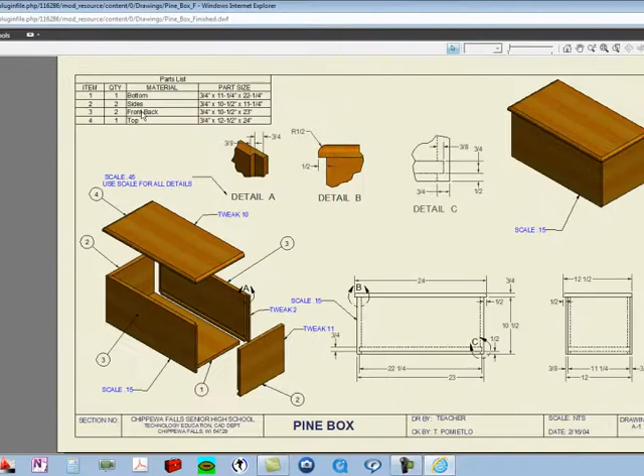The next part we're going to start is called the side. Looking at the side, the measurements for it are 10.5 inches tall by 11.25 inches wide.

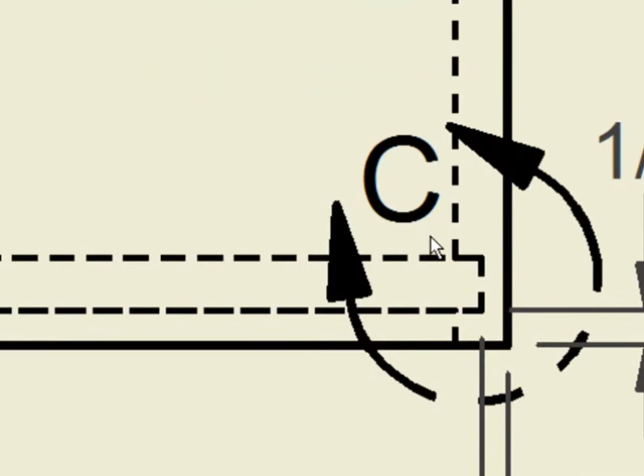If we take a look at the front view of the side, it's going to be a long, skinny rectangle with a little piece cut out at the bottom. This little piece cut out is called a dado joint. If you look over here in this close-up, you can see that little piece.

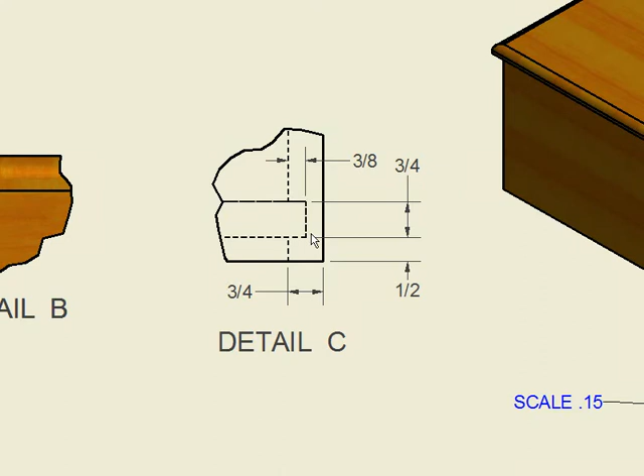Let's go up to the detail here. In the detail, you can see that this side piece comes up 1/2 inch, goes in 3/8 of an inch, comes back out, and then goes back up. That extends all the way through this side piece, this whole side.

So we're going to get started by drawing this first sketch on the side. I'm going to go to my Inventor program and start a new part again. My sketch window will come up, and this is my front view. I'm going to start by drawing that skinny rectangle.

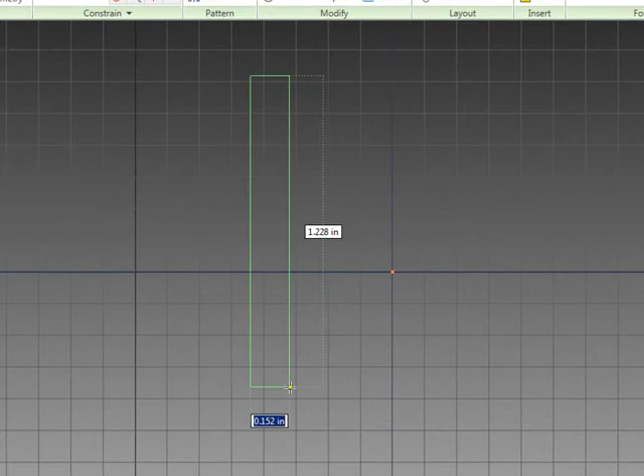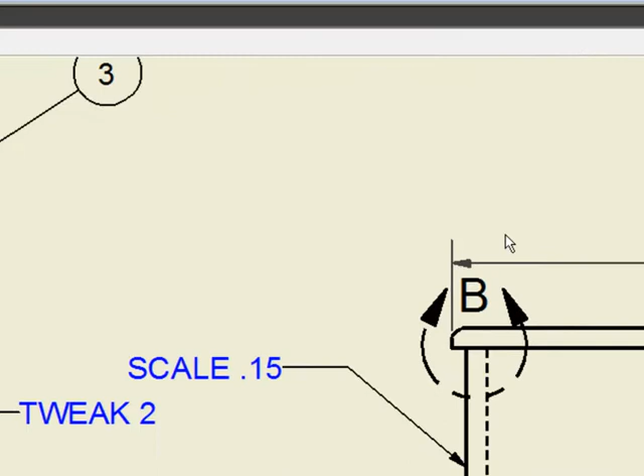Now this time I know the measurements, so I'm going to start off with my width. It's going to be 3/4 of an inch, or 0.75. Then the height of it's going to be 10.5. Now I got those measurements from right here: the distance up and down is 10.5, and the width across this way is 3/4. To verify that as well, I look up here in the chart: sides, 10.5 by 3/4.

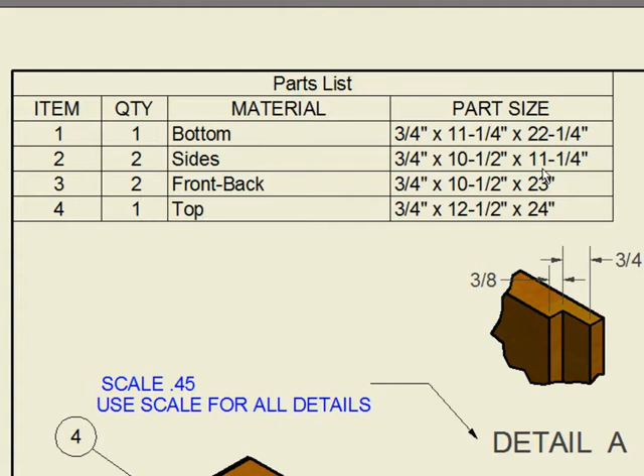Now we have to extrude it. When I extrude it, I'm going to extrude it to the distance of 11.25. Once I put 11.25 in there and hit enter, I go back to my home view and click on it, and there's the part.

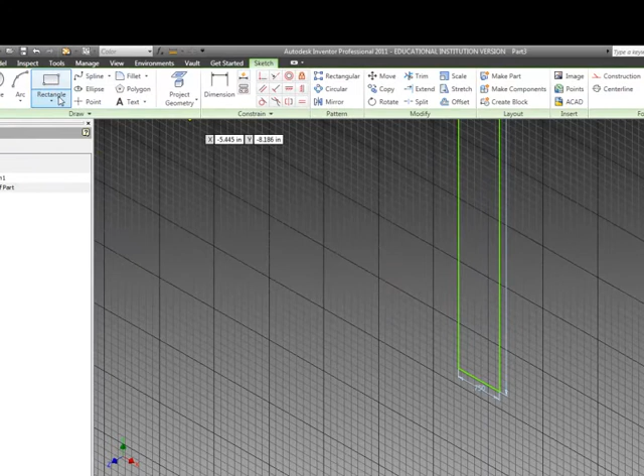Now before I extrude it, I'm going to go ahead and cut that other little piece in there, that little square at the bottom called the dado joint. I'm going to use my rectangle tool, but it's easiest to draw on this other part by looking straight at it.

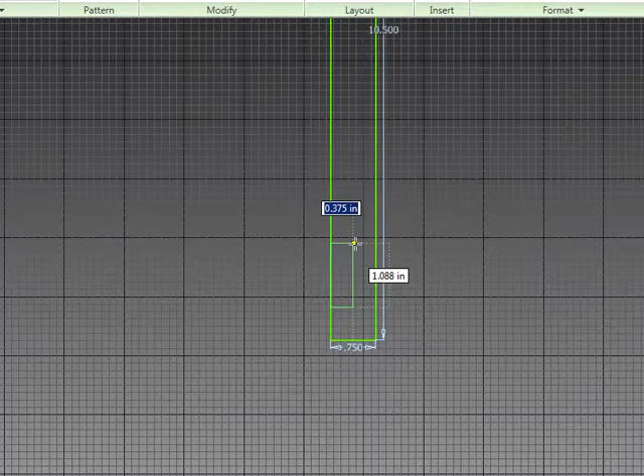So I click on my front button here, zoom in on it, and I'm going to draw with my rectangle tool. Along this edge, I click till I see the yellow dot, and I'm going to drag up. You can aim at the midpoint here, which is 3/8 of an inch, and I'm going to come up. As you can see on the screen, 0.375 is 3/8 of an inch.

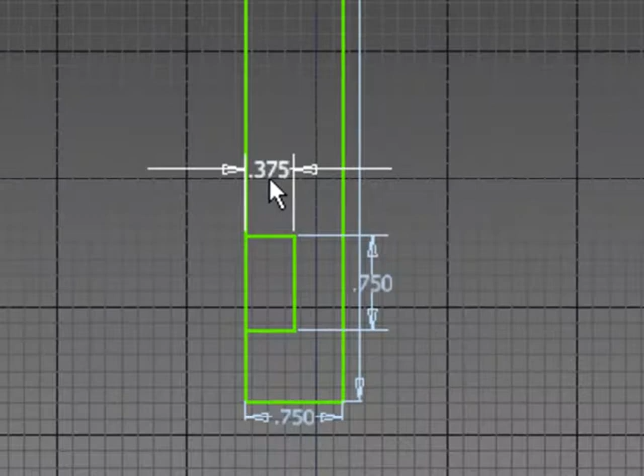So I'm going to hit tab, go to the height, and the height's going to be 3/4 of an inch because that's how thick the wood is, and hit enter. So what we have here is a little square cut out 3/8 of an inch this way, and to verify that I can dimension it like I did earlier. Click on that, drag up, and there's my 0.375, which is 3/8, and also 3/4 of an inch high this way. Now the distance from the bottom of the box to where this starts is given in the detail view here at the bottom.

You notice the measurements between these two lines right here. This is a dimension line, and these are called extension lines that come out extending from the box. As you can see, the measurement is 1/2 inch.

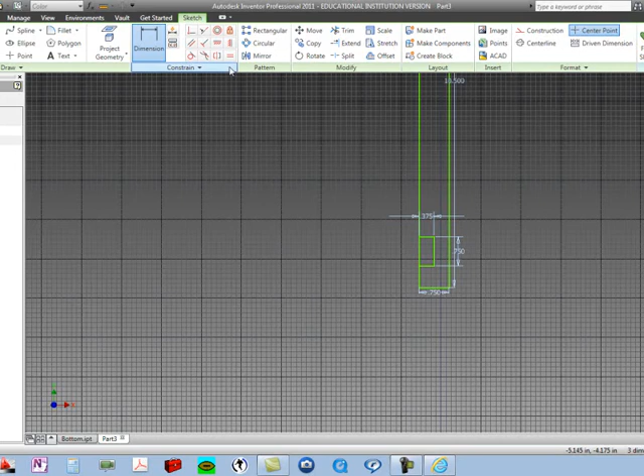So I'm going to go back over here, take my dimension tool, and click on the bottom line, then the bottom line of the dado joint, drag out and click on the number and change it to 0.5, which is the same as 1/2 inch. As you can see, it moved it up to 1/2 inch.

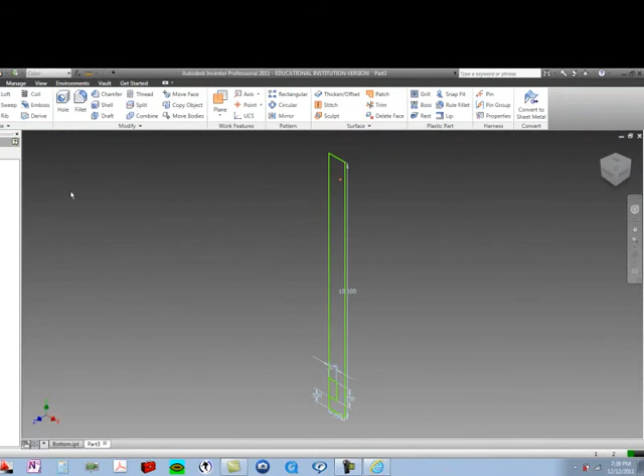Now I'm ready to extrude it. I'm going to hit my finish sketch, go up to my extrusion tool, and select the region I want to extrude. As you can see, again, it's 1 inch. It's extruding it out with that joint in there.

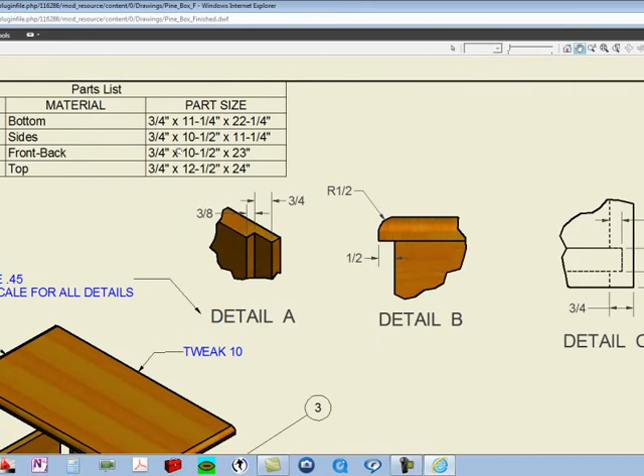I'm going to put my measurement in there, and I know the measurement is 11.25. Again, that measurement comes from my dimensions. You look up here for the sides, 11.25. I'm going to hit OK.

I'm going to change my color again on material, clicking, going to T for tan, clicking on tan, and I'm going to save my part. I already have my bottom in there, so this time I'm going to save this one as the sides. Notice that it's still in the pine box folder - it's important that it gets put in there. I hit save, and I'm finished with my second part already.